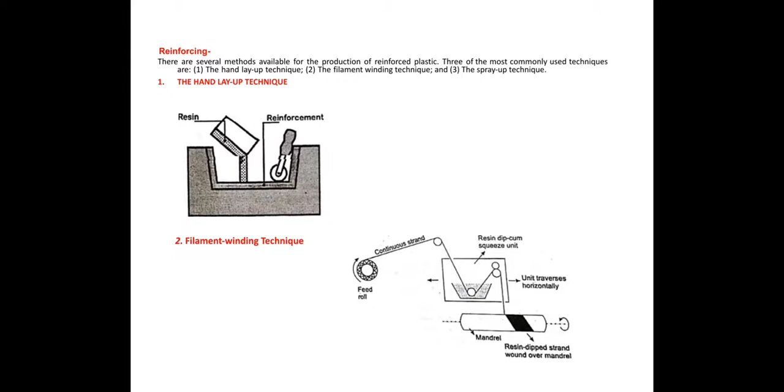Here we are going to discuss two separate processes: one is the hand layup technique and the second one is the filament winding technique. Now, the hand layup technique is the simplest technique. This is the mold. This mold is open to the atmosphere. You see the mold is open.

This is the container or device in which the liquid plastic matrix resin material is stored. Then this is the hand roller. This is the handle, so manually we can apply pressure here.

First, at the bottom of the mold, the first layer given is polyvinyl alcohol or silicone oil. That coating is done first. Why is that coating done here?

Because after making the product we have to remove the product from the mold. At that time the product should not adhere or stick to the mold walls and the bottom portion of the mold. For that purpose we first apply the layer of polyvinyl alcohol or silicone. This is the first step.

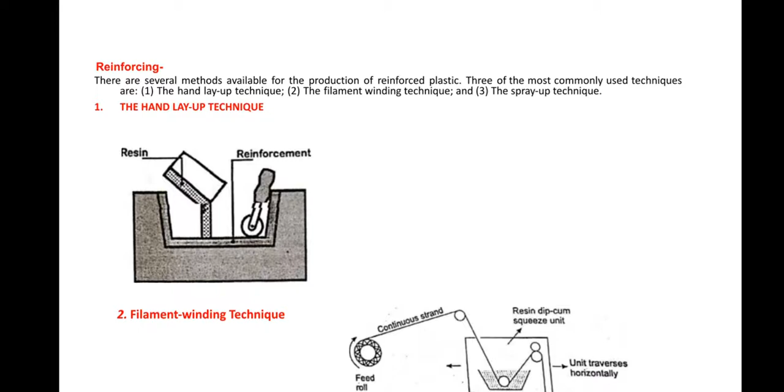After that, we manually apply pressure over that composite material, that is, fiber reinforced plastic material. Why? Because during the process sometimes air may get entrapped between the matrix and the reinforced layer. By applying pressure manually with the roller, we can remove that entrapped air or any bubbles.

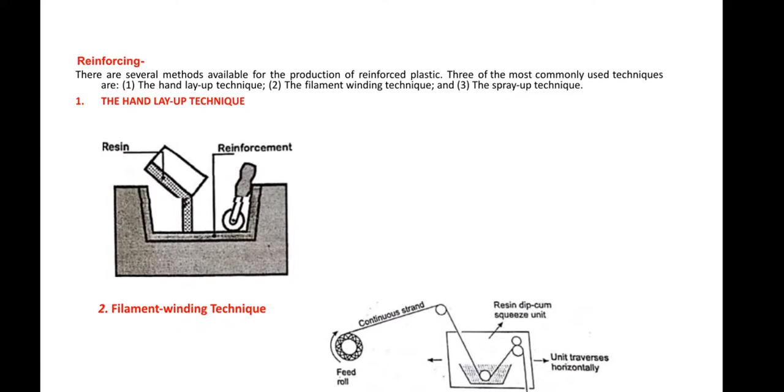After that, it is heated to a particular temperature. It is known as the curing process. After heating, perfect bonding between the matrix and the reinforced material takes place. After completion of the process, the product is taken out from the mold. This process is known as the hand layup technique.

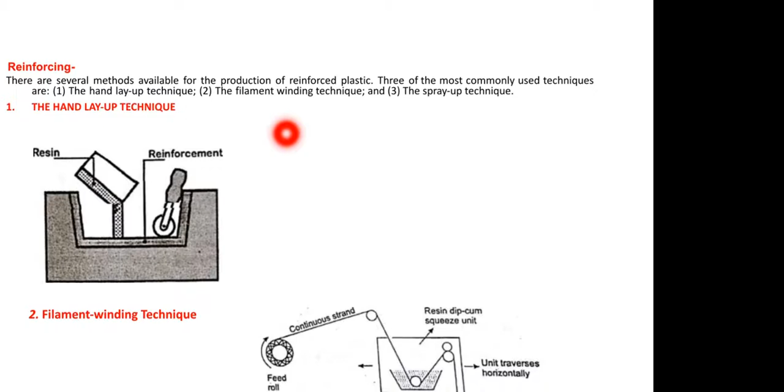After removing the product, sometimes some finishing operations are required on the finished product. Some trimming operations; some extra portions are to be removed. Then the product can be used for the required purpose. This is the hand layup technique.

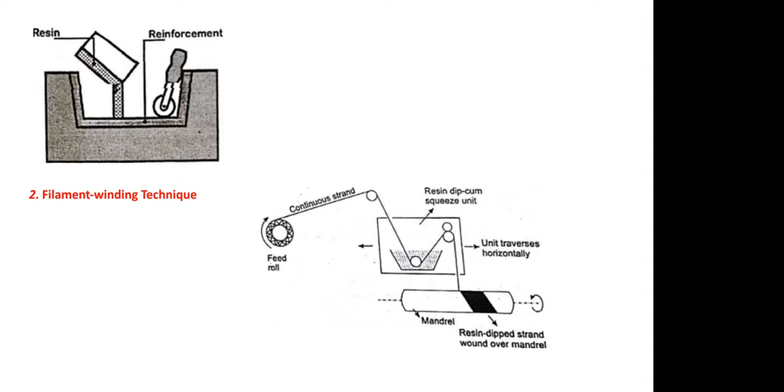Now, this is the filament winding technique. This is the feed roll, so we can feed the continuous strand of fiber. These fibers are the reinforced material. The reinforced material passes through the resin. This is the container in which the liquid matrix resin is placed, so the reinforced material passes through the container containing liquid matrix resin.

When these continuous strand fibers move through the matrix material, liquid matrix gets deposited on the surface of the fibers. After that, they are wound over the mandrel. This is a rotating mandrel.

One more thing, this unit is continuously moving backward and forward, and the mandrel is continuously rotating. Because of that, the fibers continuously get wound over the mandrel. After that, curing takes place, meaning it is heated to the required temperature.